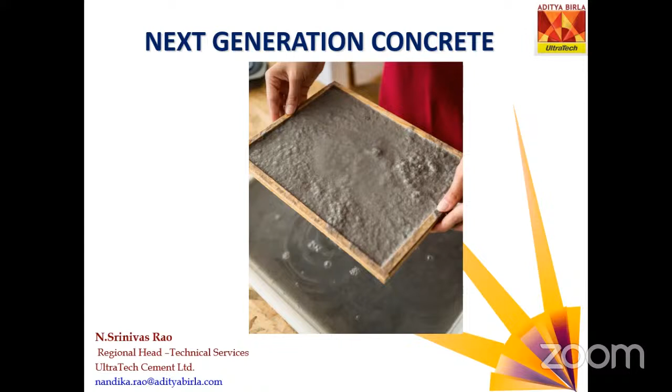Moving forward, the next generation concrete refers to the formulation that enhances performance, based on so many parameters and economic design, to meet the challenges in construction. Sustainability is most important right now as we move towards carbon footprint and net zero buildings. So the next generation concrete is moving in this direction from conventional concrete, and we are also trying to manufacture some recipes for the next generation.

If you see this particular slide, I want to throw a glimpse on where the world is moving towards in construction patterns. If you see the consumption of cement, the average per capita consumption of developed countries is far higher than India's per capita consumption. The world average is 262, and India is 100.

So there is an absolute requirement today as we march our economy towards developed countries - this consumption should also be increasing. How can we increase it? Simply, we have to give the construction industry a different type of concrete. This plays a very important role, and I want to highlight this particular point.

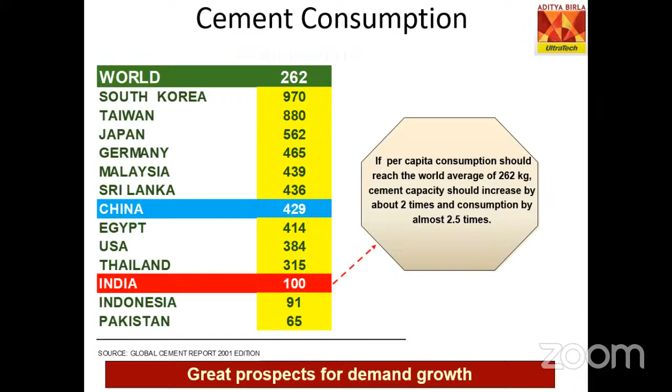Moving forward, I just want to show this - I like to show this one. This has been the present slide, given by one of my seniors who I always take as a guru. This showcases the civil engineering pattern where it's like a 16 million year old tree which has deep roots in the industry.

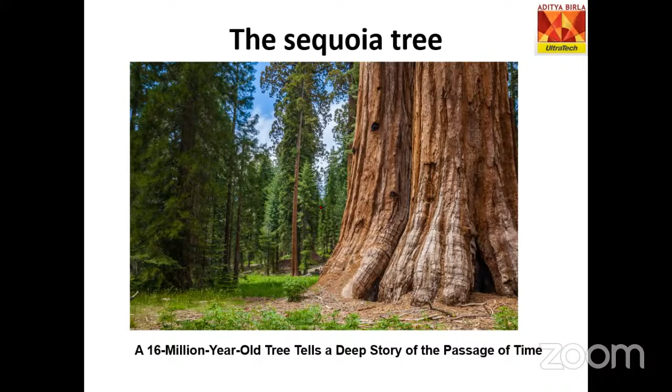I consider civil engineering like this - even when it grows, it creates a lot of space for people, meaning it never distracts or obstructs anything, so it grows like anything. Civil engineering is often called an enormously growing branch, and it's sad that in the last 2 years we haven't been able to attract as many students as required. But as faculty members, we can make students understand this civil engineering pattern well.

So I'll start my presentation. Having said this context, it started with stone. Earlier, stone was available in abundance, but it also had constraints - it's a heavy material, it has to be moved, you cannot move it for the largest distances, and the cost was high.

But still, if you go to the history, we as humans have built a lot of structures with this generation - be it temples, dams, or the oldest structures.

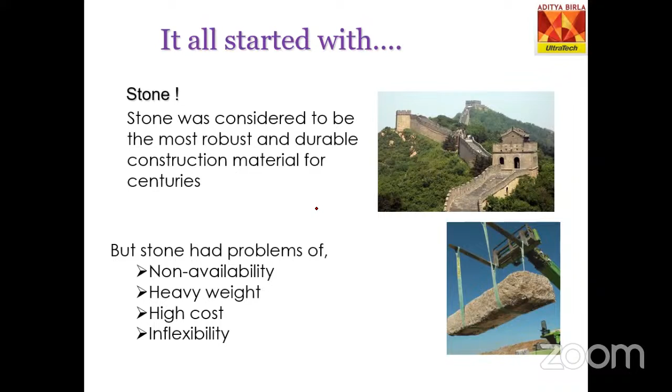Having said this about this pattern, what is the solution right now? We have to make some alternative for that. Then came concrete, which was a solution provider for replacing stone. Many people call concrete a 'flowing stone' because it can be manufactured at any place required - only 3 or 4 materials are needed.

We can place it in any location, manufacture it, and shape it into whatever form we want. This is called a flowing stone.

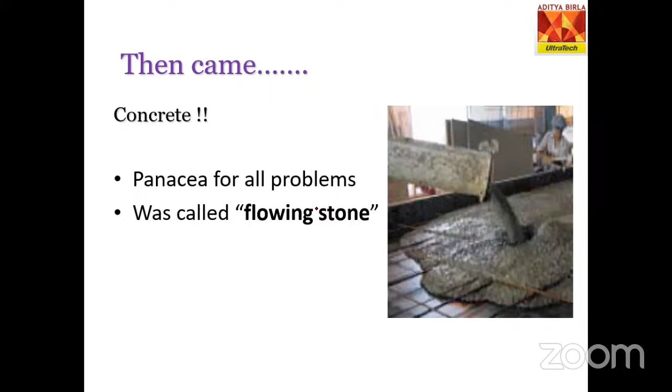After that came an era called special concretes, which is today's topic, where we can alter the properties, behaviors, composition, and performance of concrete as per the requirement or need basis. That is a special concrete.

Conventional concrete has some basic properties everybody knows, needless to explain. But what are the special concretes? What innovations in concrete are happening? I will explain in the further course.

This photo I took way back in 2017 when we offered a solution for a government requirement project where they wanted to completely remove old construction systems.

This place is called Erravally, where if you belong to Telangana, you'll know it has a very prominent role, as the ex-CM had his own constituency there. He wanted to offer 2 BHK houses for the people.

It was a requirement for the people, and one of the main agendas in the election campaign was to give it at free cost. But when he came into power, there was a challenge of construction because he wanted to build very fast, reduce cost, make a durable building, and also make it economically viable. These four challenges were thrown to a civil engineer, and we went to the site and saw these photos.

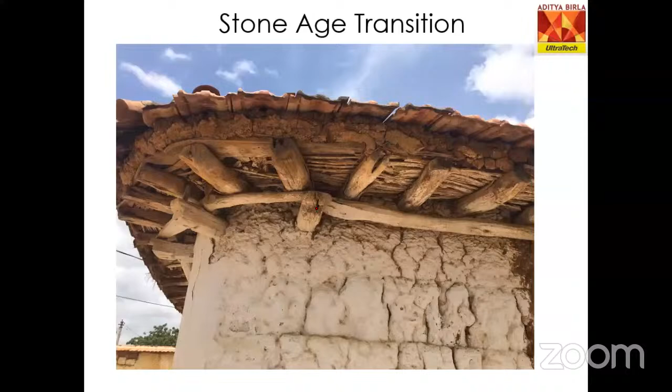We offered a technology called precast, or shear wall technology, where the entire structure, from the base or foundation, can be erected as a single formwork right from the columns to the beams and slabs, and it can be cast at the site at convenience.

Believe it or not, it can be constructed within 7 to 10 days. The whole shell of the structure can be built in that time. This is the industry demand that people have accepted.

It is earthquake proof, it is fire proof, it is very fast to construct, and within no time people can occupy these buildings.

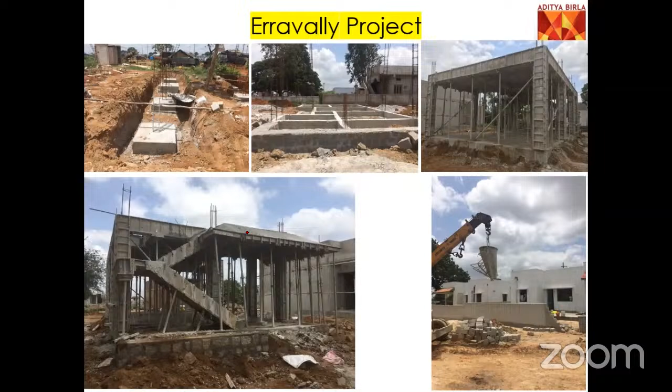This is a classic example from my experience when I joined Ultratech in Telangana. What I learned from this is that concrete is a very safe material. It uses very few natural resources, unlike what people say about its carbon footprint.

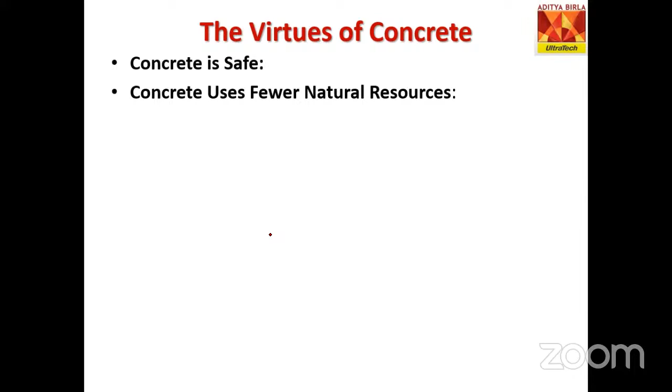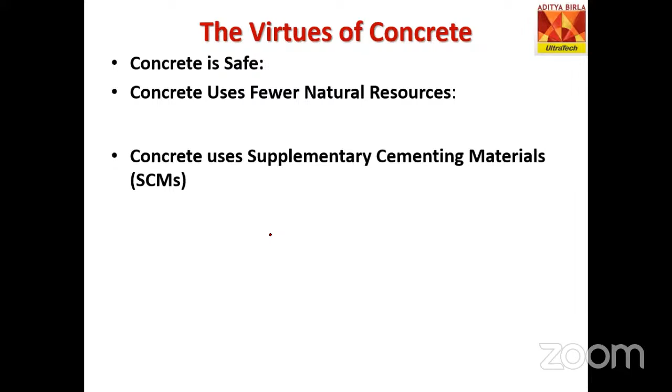People say that producing 1 ton of cement takes almost 1 ton of resources. But thanks to new technology, we are using supplementary materials, replacing cement with cementing materials like fly ash, GGBS, metakaolin, and other materials that people consider waste. These are being consumed into concrete, saving a lot of energy and materials.

Apart from that, concrete is also now using recycled material. I have a slide on recycled concrete.

Apart from that, to start the cement process, there is a lot of requirement to burn fuel. For example, to give energy to the process, people are using recycled material, such as scrap tires, as fuel.

In recent times, there was news about a brand being banned - I don't want to name it - where the waste material could not be dumped anywhere because it was food grade material. It could neither be consumed by humans nor animals, nor reused in any form.

In that situation, the cement industry came forward. They took this rejected material, which the government did not allow to be used otherwise, and used it as fuel in the cement industry, maintaining that ecosystem.

Even the waste water used in RMC, ready-mix concrete, is again being reused for material because it has some cementitious material. So all these are the virtues of concrete.

A lot of research is going on in the industry right now. People are using cementitious material in terms of blended cement, fly ash, GGBS combination. If you see the recent trend, new sets of cements are coming. For example, composite cement is one innovation coming into the market and will continue in future, blending two materials like fly ash and GGBS. It now has a code, and it has a very valid reason for the industry because it saves a lot of environmental effects.

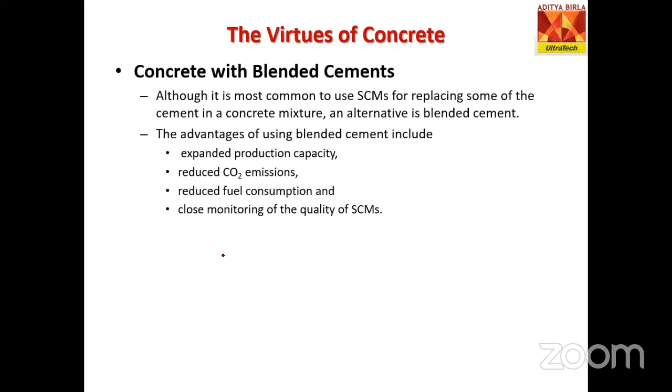So these are the effects where people are going, and this recycled material I was talking about, the aggregates and everything, can also be viewed in the next slide.

Now coming back to aesthetic structures, concrete can be built higher and higher, taller and taller, in whatever shape you want to construct. Right now, people across the world are aiming for constructing taller and taller structures, which is actually a game changer in society. For example, any country wanting to attract tourism claims they are going to build a taller structure, like Burj Dubai or other structures, where the tallest structure is referred to as a tourism attraction.

Now, to make a taller structure, often we cannot use conventional concrete. We require some specialized concrete. In that context, I will be showcasing some varieties of concrete in future.

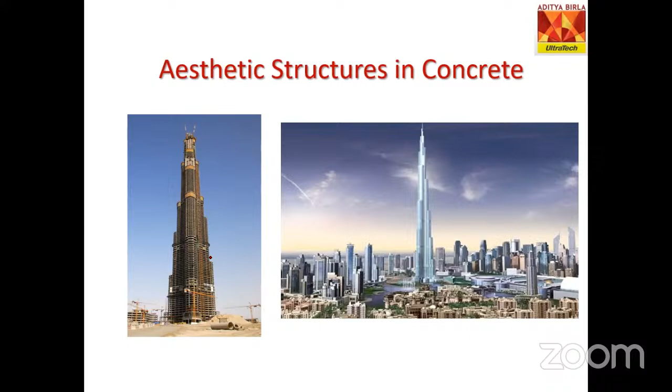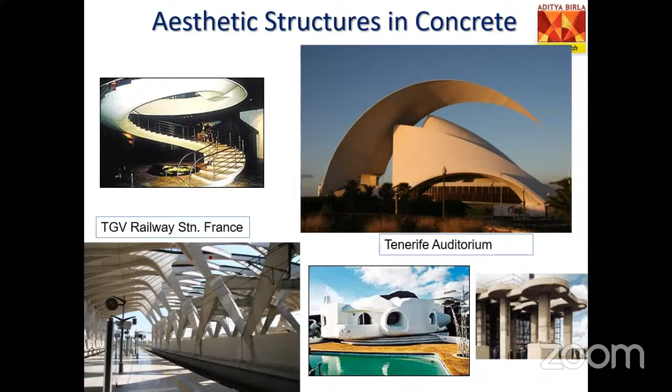This picture represents that concrete can be twisted, shaped into any shape or form, whatever design we require. Adding to that, concrete is generally considered a gray or dark material without attractiveness. Now, thanks to the new chemical industry, we can add a lot of pigments and dyes to the concrete and make it very colorful, like shown here.

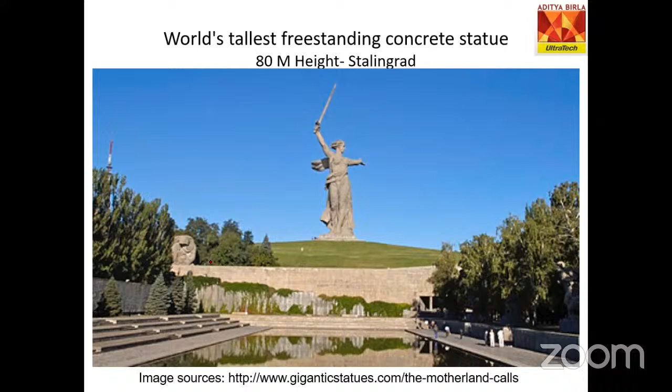This is one of the tallest structures I want to highlight, though it is not made with 3D concrete. The structure in Stalingrad is an 80 meter height structure, made only with concrete, no other materials except reinforced steel fibers. Going into the history and sources, which I have noted below along with the references mentioned, this is one of the 80 meter height concrete structures made in Stalingrad, in the USSR, Russia.

Now coming to the sustainable part, roadways. It is one of the saddest stories that most people who are killed are not killed by terrorism, floods, or natural calamities. Most deaths occurring in India are actually happening due to road accidents. Road accidents are not mainly due to overspeed, but due to the bad quality of the road.

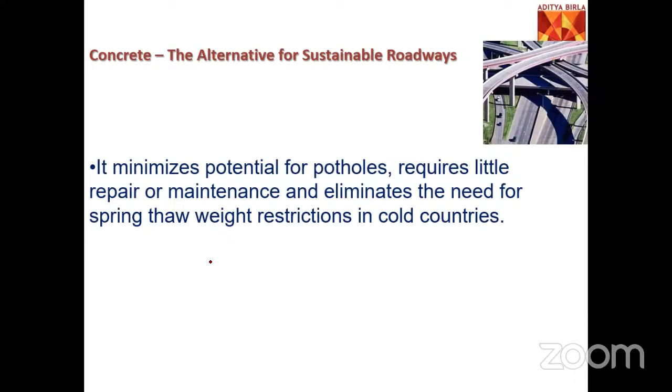Many of the potholes you have seen in the industry are the main culprits for accidents and casualties of human beings. Now there's an innovation technology that has transformed and reformed the way we are making roadways in the country right now.

The cement concrete road, or white-top road, is more economical than asphalt in the long run. People say BT roads are more durable, but if you calculate the life cycle cost analysis, you see this white-topping road plays a very important role.

We chipped this road and used an advanced material paver machine, brought from another region. The top layer was scraped, the bottom layer was hardened, and immediately this white-top road, with a thickness of 4 to 6 inches as per design requirement, was made. Thermal gradient grooves were cut, and it was made ready. Even after 12 years, it is working without any maintenance.

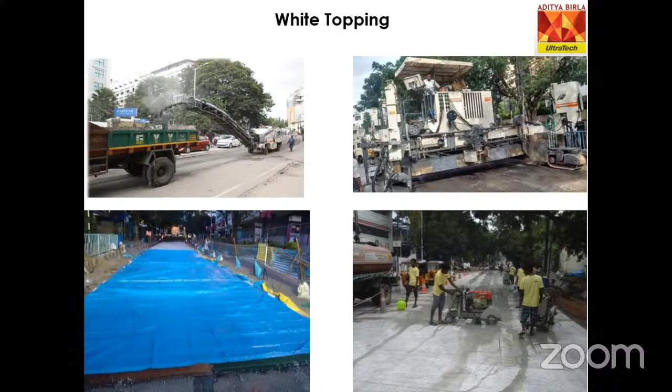It's a zero maintenance road, and you can see the rider comfort on the road - it is absolutely stunning. Seeing is believing. This is the white-top road we have done in our own Telangana, one of the new technologies that is really succeeding.

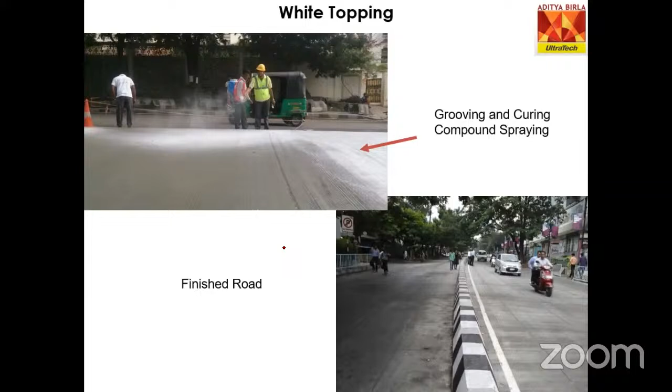After seeing the success, the BJP-led government, through Nitin Gadkari, the minister for roads and transportation, also offered that it can be implemented all over the country. So this technology is changing the face of the roadways that will be constructed in future.

I won't discuss concrete pavement further due to time constraints. I just wanted to show the changes happening for innovation in concrete material itself. For example, the aluminum formwork I already explained is a very lightweight material that can be fitted with a simple nut and bolt system.

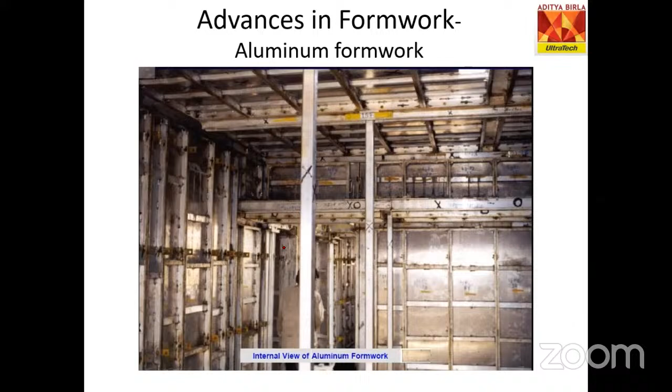With the help of two levers, we can assemble the concrete formwork faster than conventional steel shuttering formwork. All the walls of this building can also be cast with this formwork, which is very light, and the finishing is very smooth.

This is the entire building - all the walls and slab shuttering, the wall shuttering, even the provision for windows were made, like a single unit. If you look at the labor, you can see hardly 3 or 4 laborers on the site itself. With the scarcity of skilled labor in the industry, this proves a very important milestone for us as an industry and as a construction fraternity.

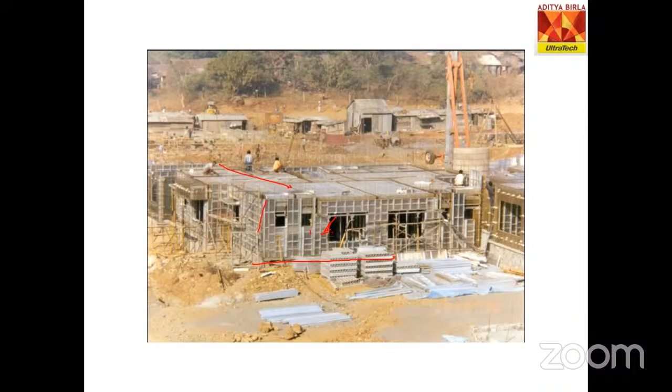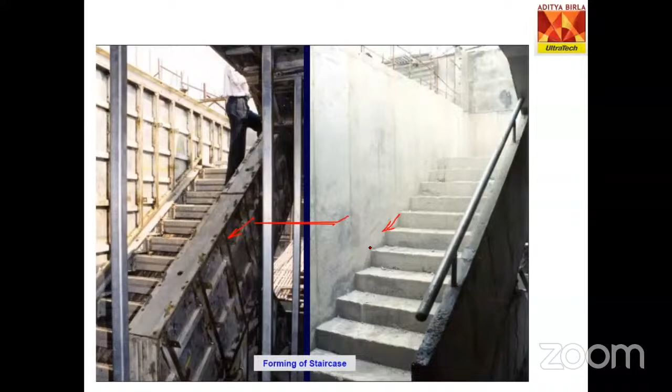This plays a very important role where we want to increase the pace of construction. Even the staircase - this is the formwork, and this is the concrete after it was cast. The entire thing, from staircase to building, can be made in a better way. This is the door, window, column attached formwork - all aluminum.

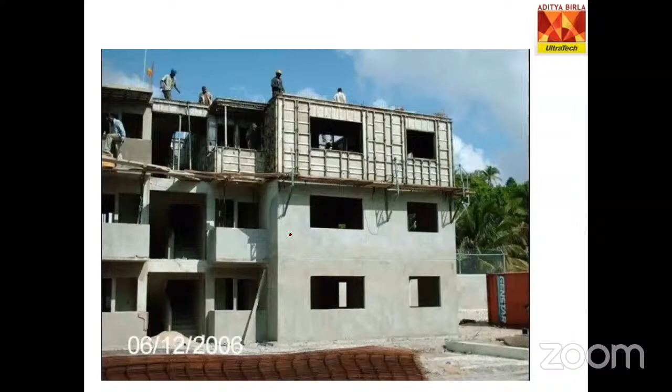This building shows that 4 floors can be built very fast, and the formwork can be repeated, simply taken from one floor to the next. In 16 days we can complete the entire 4-story superstructure. This rapid construction really helps us as a solution provider in the industry, where fast building construction happens without compromising on quality, aesthetics, or design - everything is taken care of, as fast as we can build.

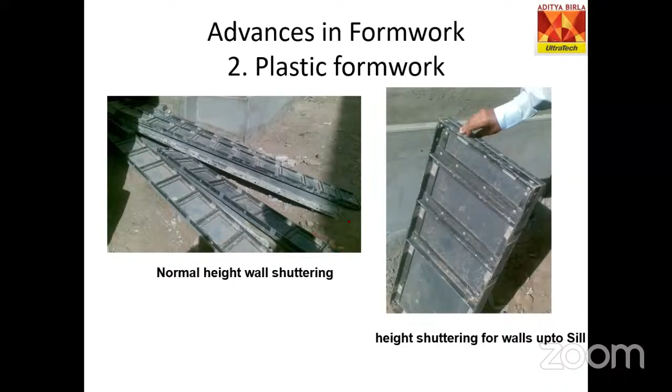This is the challenge: four stories are being constructed in 16 days. This is true for the conventional part too. At sites for individual houses, replacement of materials is happening. This is actually a nut and bolt system. People can construct and make a wonderful structure without any undulations. For the walls, geo panels are also available.

Now coming to the innovative, next generation concrete, the first recipe I can show you is lightweight concrete. Everybody knows we reduce the density of the concrete by using lightweight aggregate, or infusing the materials required to make concrete very light. So many materials are required for this, and they are available right now.

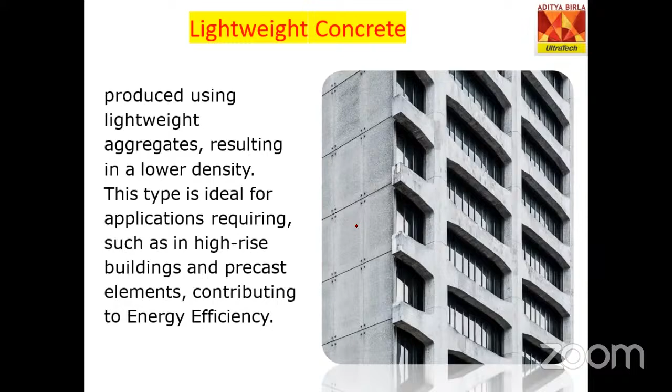For example, this is foam concrete, which we manufacture at our own RMC, where foam is induced into the concrete itself. The density is reduced to 1/6 or 1/8, from 400 kg per meter cube to 1600. The strength will be around 1 to 15 MPa, because it is only for barrier purposes for walls and similar applications.

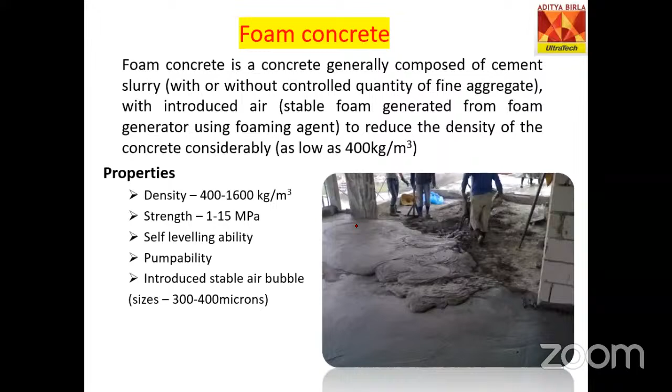It is a very good pumpable material, with a stable air bubble system we have introduced which occupies the concrete as voids, but they are not interconnected. The idea is that if they were interconnected, there would be leakage problems. So this is the new technology we have been developing.

This is the foam concrete manufacturing process at RMC. It's a simple technology that can be made available anywhere now, in Telangana or any part of the country.

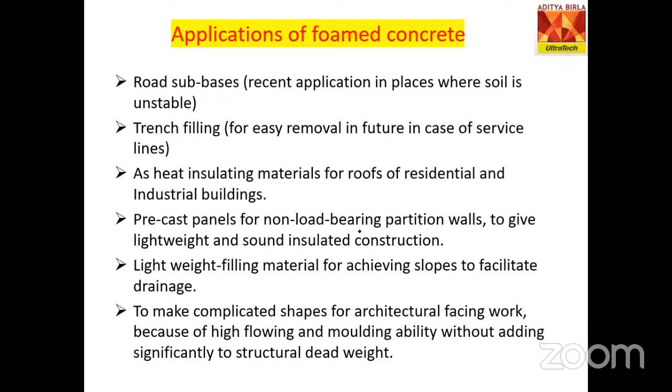Applications of foam concrete are many. For example, we can use it as a heat insulating material, for road sub-bases, trench filling, precast panels for non-load bearing members, light filling materials in slopes where we want to control water inflow, and even for filling sunken slabs in complicated situations. So lightweight concrete comes into the picture.

I'll show this video after this presentation. This is one variety we call in UltraTech, called Lightcon, branded for use. It's a very light material, pumpable. If you want to increase the height of the flooring, or maintain a slope, this can be used as a filler material.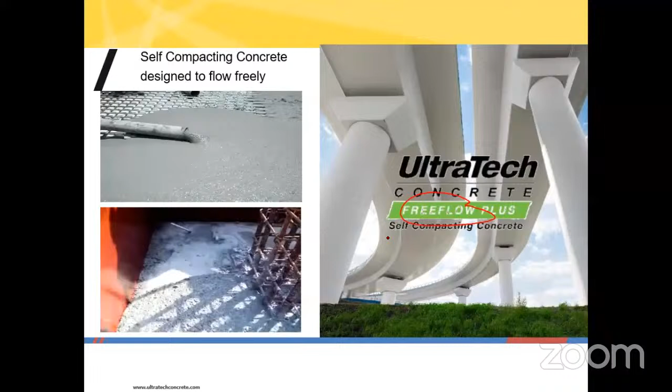Now, self-compacting concrete, people are very much aware of this one. In Ultratech we have a product called Free Flow Plus concrete, which gives a very consistent self-compacting concrete, with so many advantages in the market right now.

These are structures where we executed a project called Hypercon, high strength concrete with self-compacting concrete. The grade of concrete can be M10 to M60, and the fresh property of concrete should have a minimum 500 flow, which we test at the site using the flow table.

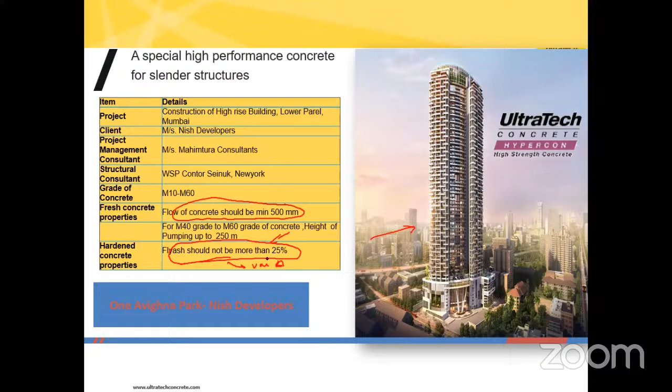These were the challenges we faced, including that we should not use more than 25% fly ash. Having said so, we used VMA and other materials which enabled us to make the concrete self-compacting. This was executed in a project called Avighna Park Development.

Leakage issues are one of the main culprits in the industry, causing degradation of buildings and repairs, which we often see even in newly constructed buildings. This causes a lot of revenue loss to builders and contractors. Having understood this problem, we designed a guaranteed concrete called Aqua Sealed, which comes with a 10-year guarantee and doesn't allow water to leak, especially in basement areas.

For larger structures, we use crystalline technology to plug gaps. This technology uses a hardened gel, so when there's a small crack, moisture ingress causes the gel to react and occupy the space created by the crack, sealing it and never allowing water to pass through. This is one concrete where we give a waterproof guaranteed concrete for the damage.

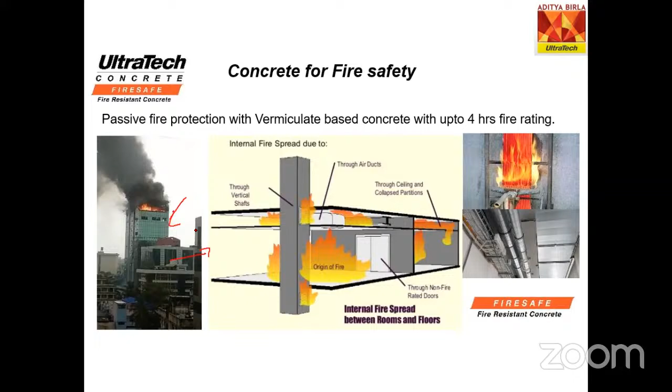We manufacture this fire-safe concrete from our RMC. It's a fire-resistant, vermiculite-based concrete, meaning it retards or delays the firing rate of the concrete, which helps evacuate people and stop the loss of revenue or property from this kind of accident. These are new types of concrete where we can give a customized solution based on requirement.

Now these are some pictorial graphs showing our testing procedure. I want to show this for academic interest, to explain how we do it. This type of concrete is especially used in the depths of lift shafts, where fire tends to aggregate during an accident, so these are the areas we try to restrict and protect.

Now one type of concrete is also changing. When we look at concrete properties, it should be hard, durable, not allow water to pass through, and be very dense. Against this, we are trying to reverse the property of concrete with what's called pervious concrete, which allows water to pass through.

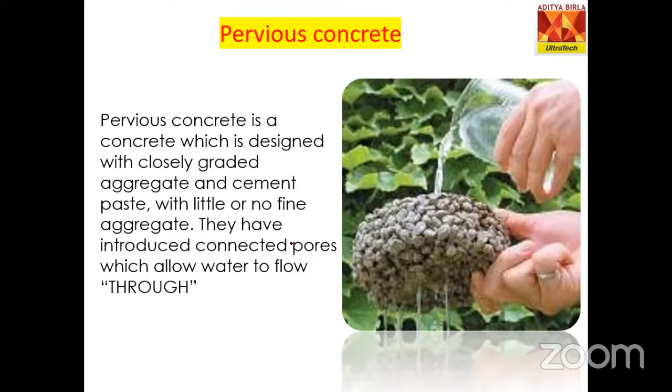This has a lot of value right now because of the scarcity of rain. In summer, many cities are struggling to get water because concrete roads that have been paved don't allow water to pass through, so the ground table isn't able to recharge. As a solution, the industry has a concept called pervious concrete, which can be made at our RMC plants.

Whatever the client's requirement, here's some interesting background: when I was in the RMC lab, we made what's called no-fines concrete, which can also be termed pervious concrete. As the pores are interconnected, it allows water to pass through. This is one of the varieties of concrete that can be made.

This is a video from one of the exhibitions where we displayed this concrete, and you can see the water passing through the concrete surface itself.

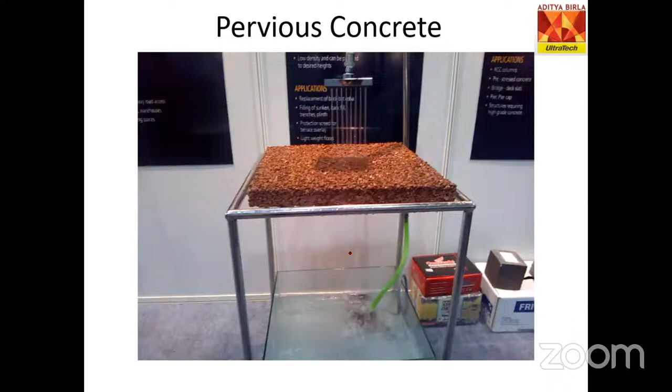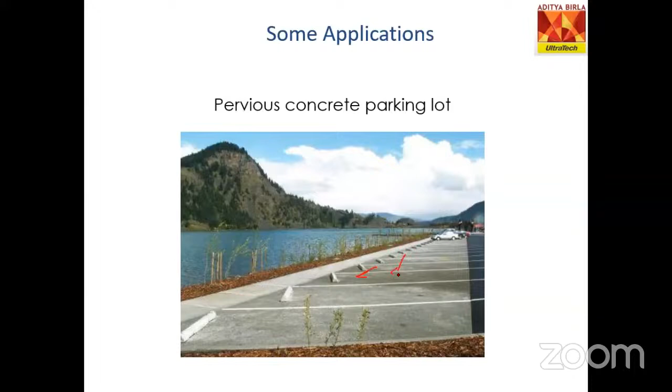So what is the application? If you see the applications, parking lots, nearby water-logged areas, or areas requiring water recharge, we can offer this as a solution provider. When rain falls, the water will be discharged and the purpose of the parking area will also be solved.

For example, in parking areas or walking areas where we need not cut these plants, or don't require proper drainage facility, we can make walkways using pervious concrete. People can walk through it, and it's also helpful for water to pass.

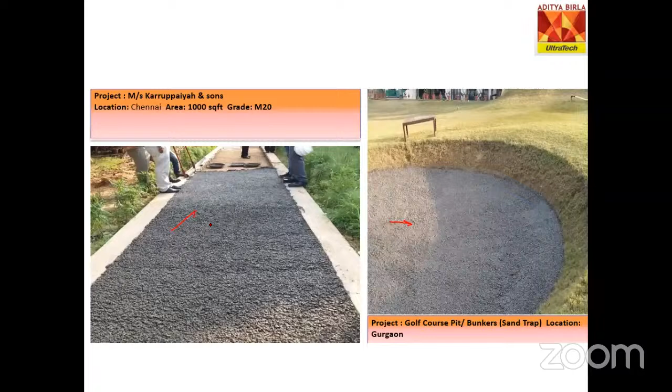This is one of the areas where we made, in Chennai, M20 grade concrete was casted for the walkway application.

These are the applications where we can use it, right from residential roads to all these mentioned areas. Recycled aggregates are coming into the picture where many structures are being demolished and industry waste is often thrown away as waste material. This actually plays a very important role right now, throwing light on how to use this aggregate which has been lying wasted in so many places.

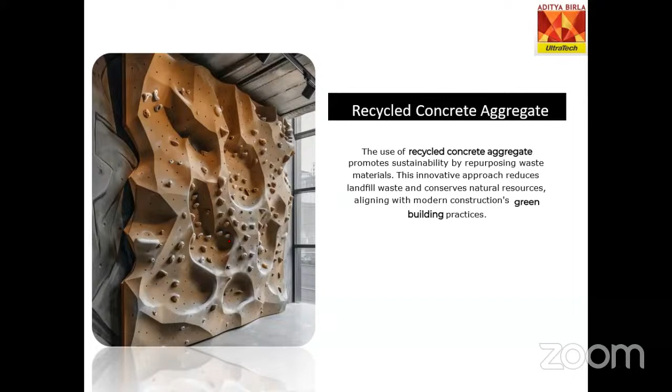The government is also moving industrial waste, and people are taking it and recycling it. We have seen that recycled fine aggregate is also something people are trying to make. There are so many industries working on this. Recently I was at a green building exhibition and saw that people are also trying to make recycled fine aggregate, similar to how natural sand is extracted. The process is simple, not that complicated, but it can be used as a recycled material.

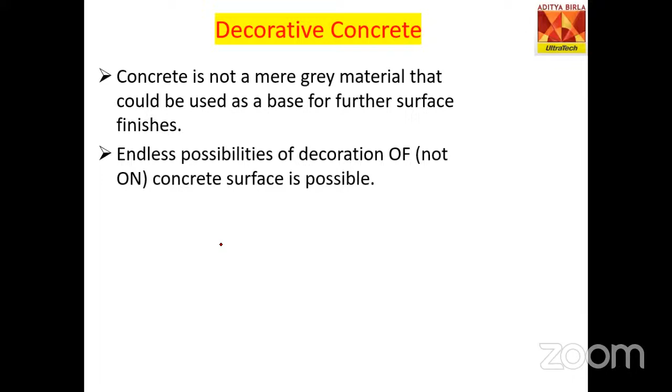Moving on, I want to draw your attention to decorative concrete, which is like an imagination of the civil engineer. People say concrete, being a gray material, is dull looking, but thanks to modern chemical industry processes, we are trying to make concrete more colorful. For example, this slide shows that even during manufacture, at the core of the concrete itself, we can make it colorful.

When we make it colorful, many pigments can be added. For example, this is architectural concrete - if you see these photos, all this flooring and finishing is made with concrete itself. If you want to replace stone or tiles, we can do that, and the longevity of these structures is very long, almost 20 years.

Maintenance is very easy, it's a washable area - whenever required we can wash it, or use some enhancers to make it more colorful. These are glimpses of case studies of projects where we have executed this decorative concrete at sites.

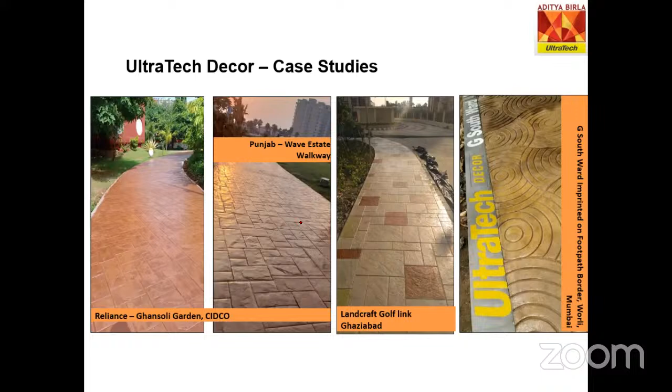After this, in kids' areas, many gated communities don't want certain issues, so we can make a ludo point, a checker chess pattern, or whatever pattern is wanted, along with granite or natural stone finishing - everywhere we can make it with colored or decorated concrete. Now these are some polished concrete examples.

The concrete itself is replacing granite, a natural material, but we make it in a granite form. People say granite is very hard and heavy to use, often increasing dead load in the structure. But when we encapsulate the same pattern into concrete itself, it can be polished. This glossy finishing pattern is the Ultratech decor concrete, or decorative concrete - sand and pepper finishing and everything.

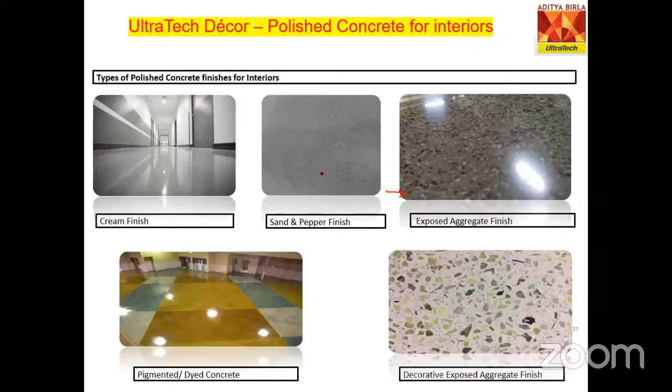For polished concrete, consider the industrial application with large walkways - for example, a shopping complex or community mall where large spaces are needed, and people use tiles or other materials. But with high footfall, abrasion increases on the surface. To resist this abrasion, polished concrete comes to the rescue of contractors and customers, easily cast with steel fibers or polypropylene fiber mesh, making a very good-looking, decent mall.

Some of the areas where we applied this are called I-floors, which is industrial flooring, where you can get a high strength grade, right from M40 to M80, which we can design in a simple way. We have trained applicators who can execute this project as well.

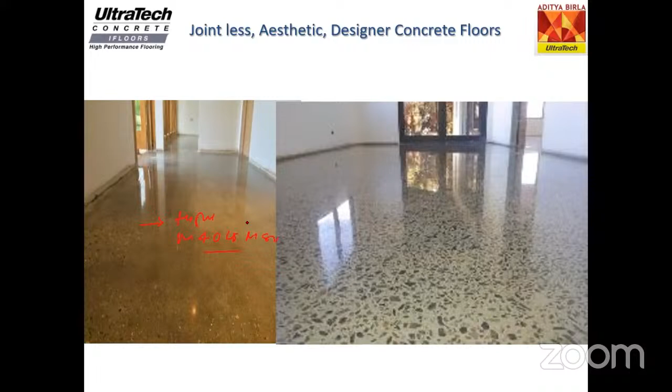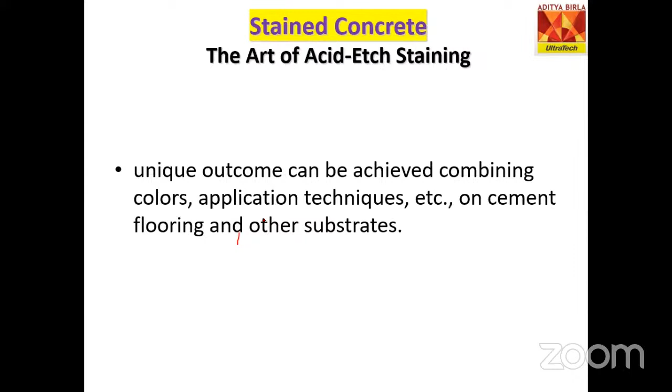Now, moving forward to the other concrete, it's called stained concrete, which can be etched with acid, and we can make colors.

So, few glimpses - this has not actually been executed, just for the benefit of the audience. We have collected these from different areas and the internet also. If you see this, it's not a natural stone - this is concrete that has been etched with acids to make it colorful. Whatever patterns you would like to have, we can make with this. Because of the dyes and pigments we use, we can make a lot of varieties of concrete, right from this kind of pattern, multiple patterns, or whatever patterns you want, using dyes in the concrete itself.

This is decorative concrete. The disadvantage of paver blocks, when you want them in a parking area or larger areas like a playground or walking areas, is that while paver blocks have the advantage of allowing water to seep inside, if one paver block comes out due to undulation or unstable bed conditions, this leads to a lot of problems - growth of trees, unwanted algae, and grasses, which is also not convenient for maintenance. So we can replace this entirely with concrete which has so many patterns.

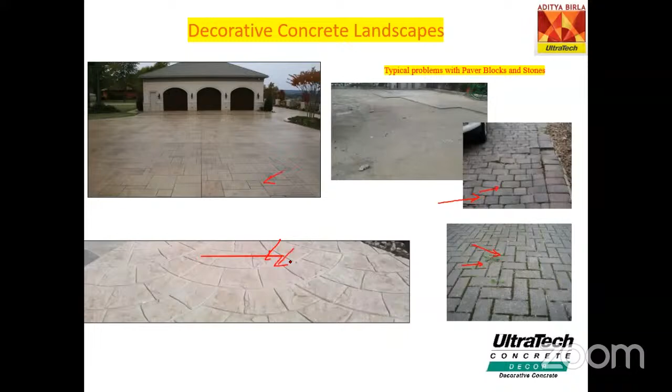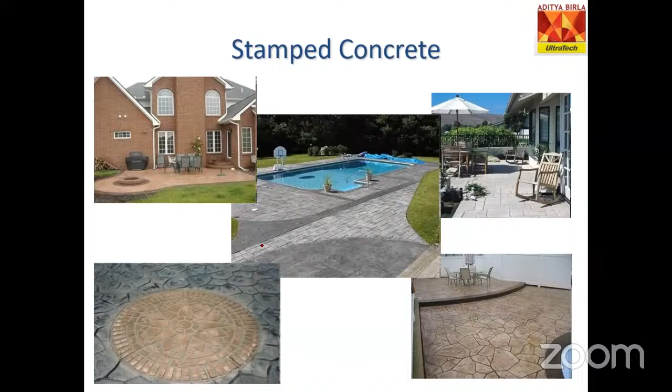So this is a wood finishing, and this is stone finishing as well. This is how we move with decorative concrete, and these are some of the patterns I already showed you. This is called stamped concrete, where we have a specific design - if you want to replace granite stone, we can, and use it at places like swimming pools, patios, sitting areas, or internal areas. Some more patterns, just to show you for the benefit of this.

After that, you've seen people talking a lot about ultra high performance concrete, UHPC, where we can achieve strength with a very lean structure, meaning we can reduce the element size also. For example, we can use it for facades, precast bridges, and architectural structures, or whatever imaginations we have - we can translate them using this ultra high performance concrete.

Recently, we have executed ready-made facades in Ultratech, or it can be customized with customers based on requirements. The strength we can achieve is almost 170 MPa with 25 MPa flexural strength. This is enormous - the benefits of ultra high performance concrete are that we can reduce the structure size and it can be transformed into any shape.

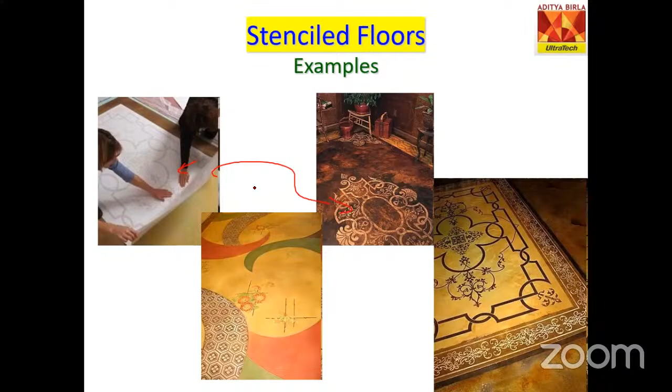Stenciled floors are now in the picture, where we can transform our old cultural patterns. For example, if you have one pattern, it can easily be transferred into another pattern by stenciling on the floors itself. This is one of the ideas where I want to show that civil engineers are not restricted only to strength or application - whatever designs, imagination, or colors you want, you can make it happen.

So I was talking about concrete furniture - a few furniture pieces, for example, can replace wood itself. Having these panels, a simple panel can be painted to make it more decorative, and you can replace wood entirely. Wood, as everybody knows, has become very costly now, and we are not getting the right quality of wood. Termites have been attacking the wood, and the maintenance is very hard and tough.

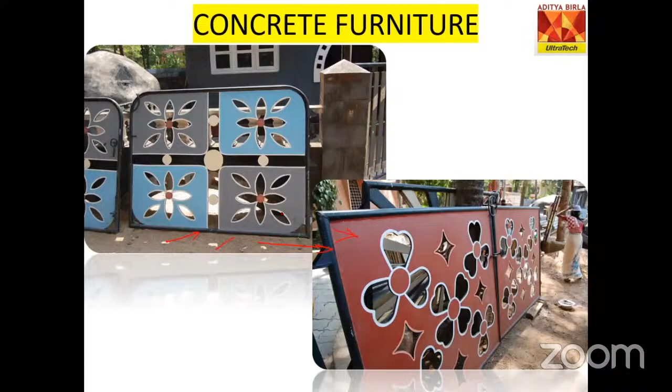So we can replace this one also. These are the areas where even the staircases, the benches, the decorative items in your homes, everything can be made. Even the gates also been manufactured with the concrete. It is not a steel or iron gate, it is only a gate made with the concrete itself.

Coming forward, the concrete countertops can be also manufactured. These are some photos I just want to show. This has not been executed by anybody in India, I'm not sure, but these are the ideas we can also explore for the students. We can make an interesting kind of project, people will be more interested to do as a project, and they can benefit a lot.

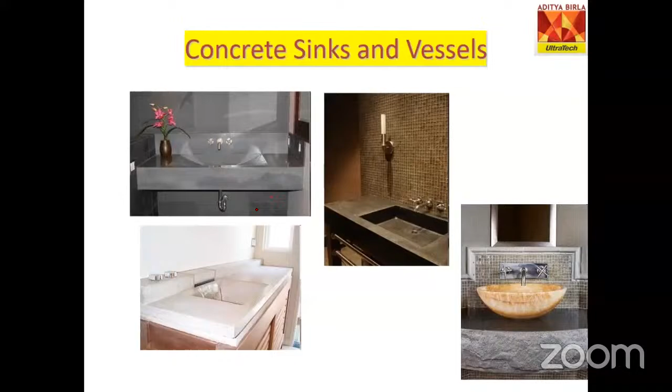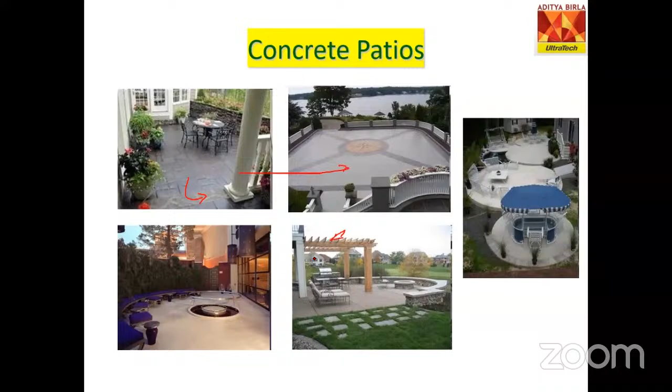So even the sinks and vessels, whatever things are there, we can make it with the concrete. These are real pictures where it was executed in concrete, wherever required you can replace the conventional material with this. All these are made with the concrete itself. This is the pattern where we can look forward for multiple designs. Kitchen places are also there.

Now I'll take you a little bit forward, where I can say what people are looking for in the future concrete. So future concretes are like photo engraved concrete, where with a technology called serigraphy technology, we can imprint our photo or the requirement image on the concrete itself.

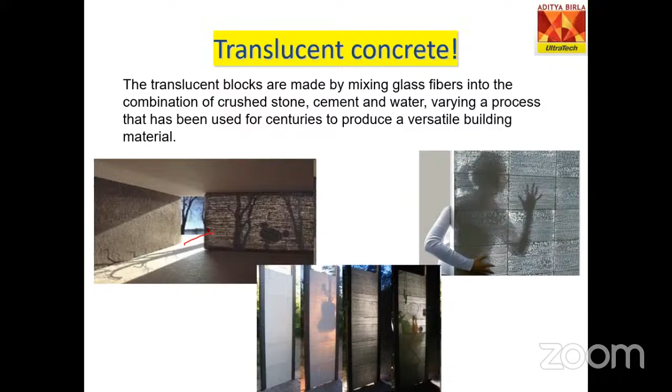Now this is called translucent concrete. People have seen it, I think many people are aware, but this has a lot of advantages. If you see, glass fibers have been mixed in, which absorb the light and make it like glass. So when light is thrown on it, it becomes like a glass. When light is withdrawn from the concrete, it becomes a normal opaque surface.

For example, I just want to play this video because it is very interesting. So I thought I'll play it, but I hope it plays. So we'll play after this.

So this will help where there is no requirement or availability of electricity, or where there is a constraint of area, we can pave a way, we can showcase it for people who often get confused in certain areas. We can make decorative kinds of parks this way, and people will be walking more on this concrete surface.

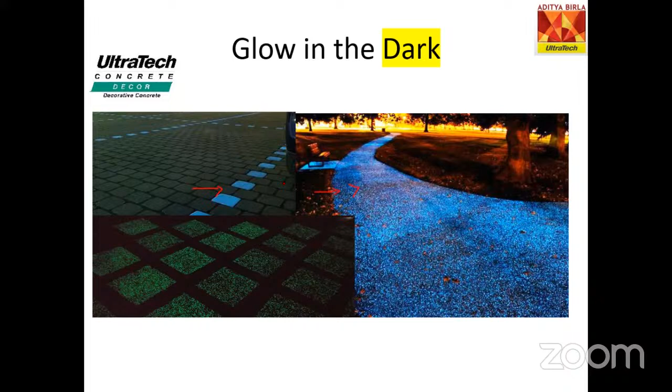So here, what I'm trying to say is that we have seen some photos where we have replaced stone, replaced steel, replaced wood, and we are also replacing natural light with electricity and vice versa. These are the things where people have seen this concrete can be bended, and with fibers added, concrete can also be bended.

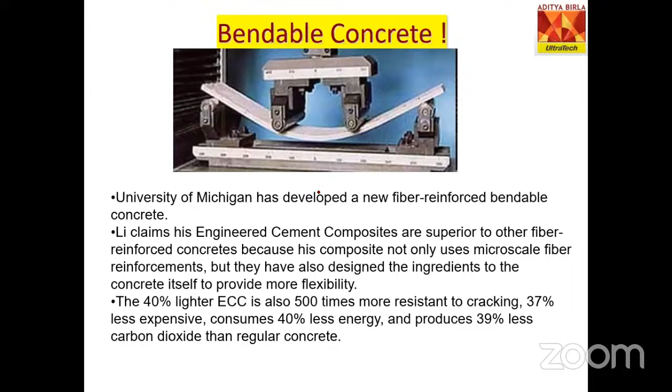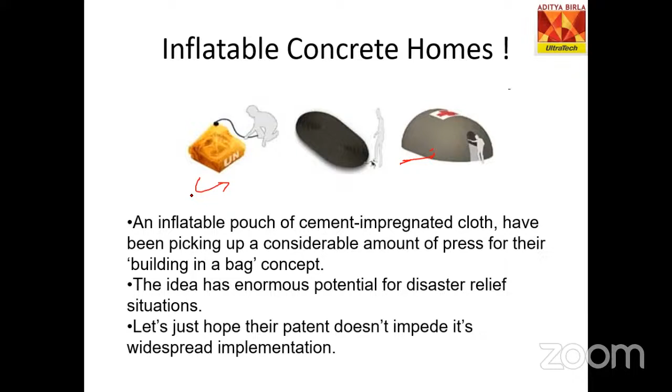I want to cover this concrete wise with UltraTech, because right from fire-safe to light concrete, decor concrete floors, pervious concrete - all these can now be manufactured with the UltraTech variety. I request any students interested, especially from academic backgrounds, who want to see this specific kind of concrete, please come to us - we'll arrange a demo at our RMC plant. You can see it, and you can also help us make new varieties of concrete. You can share your knowledge and experience so we can economize the mix and benefit the total fraternity of civil engineering. These are the solutions.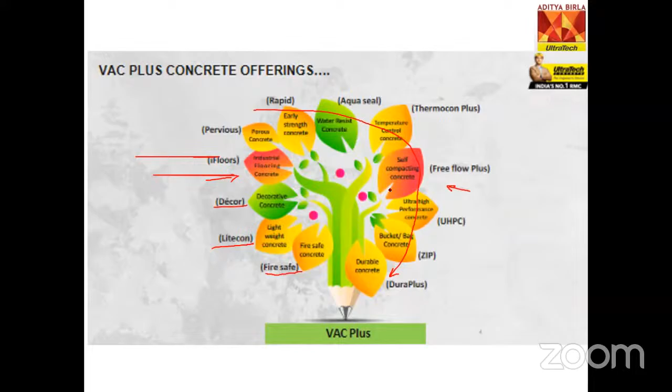I just want to close now. I will not take more than another 10 minutes.

So these are thermocon, called thermo temperature controlled concrete. This is needed where there is mass concrete involved and there is a thermal influence, for example in dams. If there is a rise in temperature in the mass concrete itself, to restrict that, we can use this concrete with materials having the ability to reduce the core temperature of mass concrete, especially in dams.

We can also use ice and other things to reduce the temperature, including cooling of the aggregates - all this can be done. This will help you in the future also.

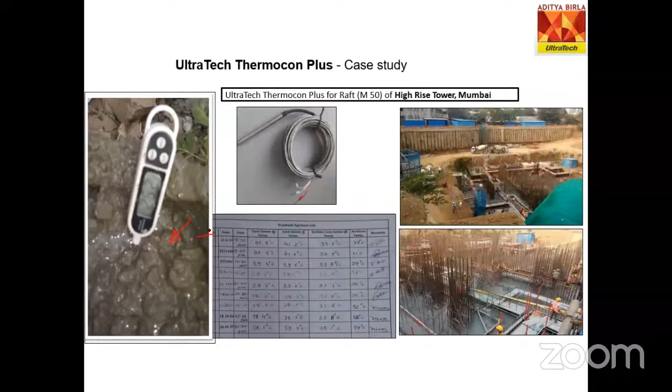Ultratech also has a thermocon project in Mumbai, where the temperature of the concrete has been constantly monitored to ensure it has not risen and is maintained. That mass concrete, M50 grade, shows the temperature maintained very well. These are areas where we can also increase the strength of the concrete.

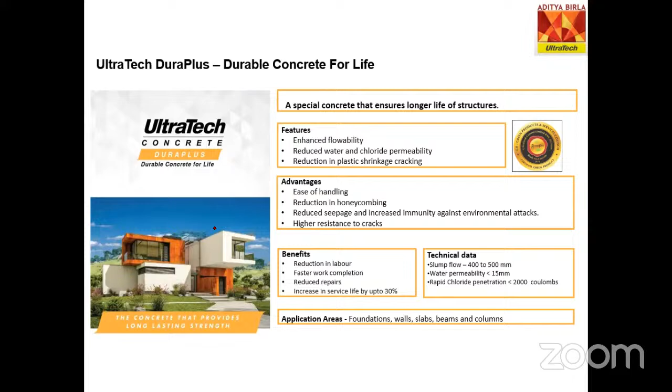We call it Duraplus - where you use the concrete, and if you want a higher grade of concrete, you can make it with this Dura Plus.

Now fibers have also been added to the concrete, and Ultratech can make your concrete have a very smooth and durable finish. It also helps with pain areas like corrosion - I will deal with the next variety of concrete. Honeycombing in concrete can also result, and this can also be addressed by this kind of fiber concrete.

This is called fiber concrete. This is called Zip concrete. This is a new, next generation concrete, I would say.

Unlike Swiggy and Zomato, where you order food and it gets delivered to you, you can order your concrete in a smaller way - smaller batching for smaller requirements. This means you don't waste any materials. When you engage a small portion of concrete, the labor charge is also high, and the application part is also high.

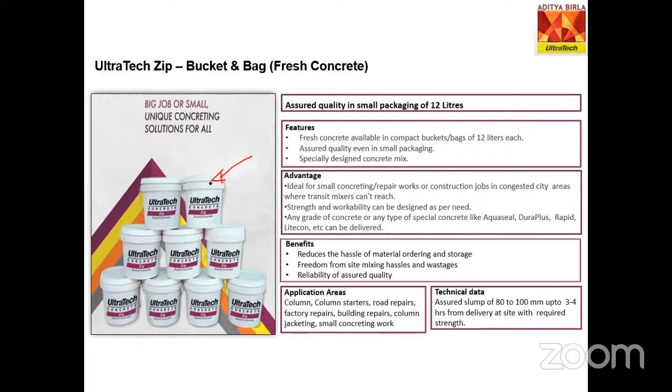So what happens is this concrete comes in bucket forms, and can also be transferred to a simple truck, and also in bags we have this facility - dry mix material that can be cut and mixed with water, and we can use it ready-made. For filling material, starters, staircase repair, or any small repairs, we can use this.

This variety is now widely receiving an overwhelming response from customers. Many customers are now asking for the repair.

Now coming to this variety of concrete, we also have corrosion protection guaranteed concrete, where we ensure that your concrete is not affected by corrosion. Corrosion is often termed as a cancer in the building, and it deteriorates your structure's quality of life. This can be addressed with the help of a corrosion inhibitor.

So what happens is it maintains the pH value of the concrete. You know it's basic, like 13 to 14. It maintains that and doesn't allow an active state, and the chlorides we infuse are also mitigated with this corrosion inhibitor. This is called the TTCI additive, which complies with ASTM G109 and has an efficiency of 98%. It can improve the grade of concrete with corrosion resistance too.

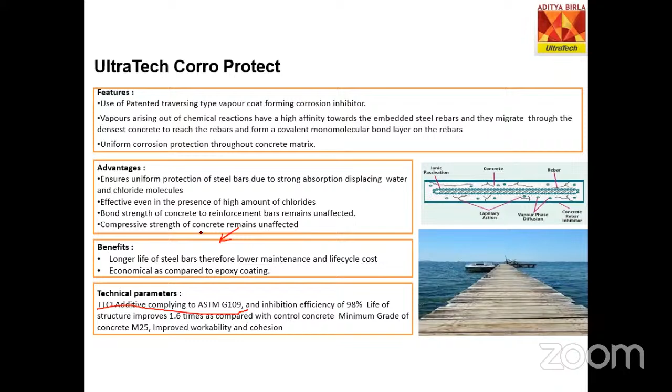So coming back to this, especially when we see marine structures, basically for pile foundations, bridges, culverts, or buildings near coastal areas, this kind of concrete can also be useful. This can be a game changer, where conventional concrete has been remodeled or rechanged.

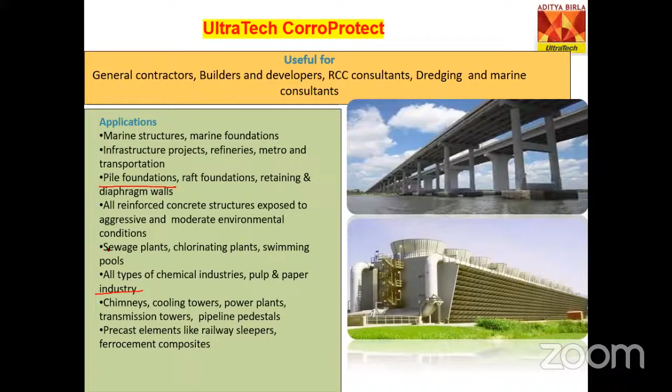So these are the smart concrete technologies now, where you can monitor your structure because inside the concrete we can place some sensors and observe the strength development. Later, over the course of time, we can regularly monitor the behavior of the concrete's strength development, and it can also give an idea of how much load or capacity it will take, and what the life cycle of the building is. It can be connected to systems, and it's most useful for the academic part, where you want to develop a newer type of concrete. This is called the smarter way for concrete.

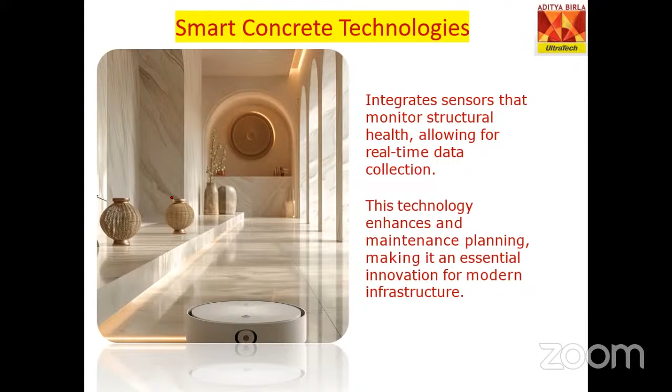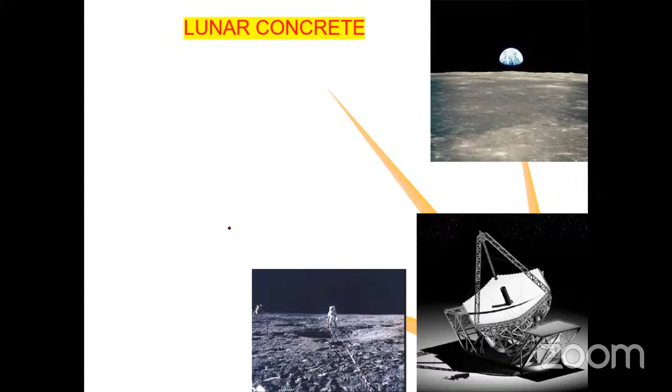And moving forward, I want to highlight that we are not restricted to Earth now. We are looking at the moon, where we see that large playgrounds can be built, research stations can be built, or structures that are ready to occupy, and it can also be used as a stepping stone. This is an area where we can stop and go for Mars exploration. So all these are lunar concrete applications that people are thinking about. We may not know that in the future many engineers will want to go to the moon for execution of projects themselves.

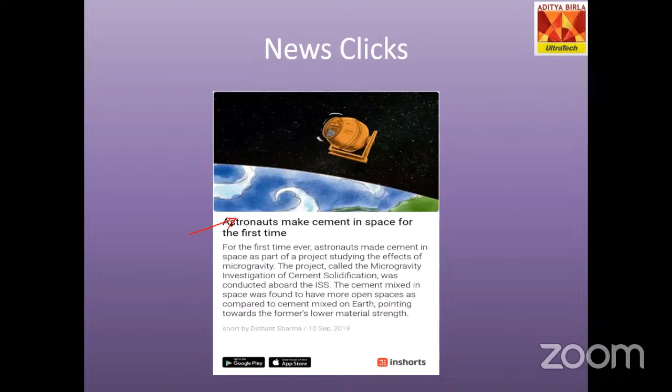So these are some changes happening in the current industry, and this is new. Even cement can be manufactured on the moon itself, because studies show that a lot of lime materials are available there, which can be directly used to manufacture cement and try to construct buildings.

Now, for concluding remarks, before I start, I want to highlight Ultratech, which is one of the largest manufacturers of cement, holding almost the number one position in India in terms of manufacturing capacity, and it's the world's third largest manufacturing company.

So we are often looking forward to diversify cement uses, be it in innovation concrete or innovative concrete, which I was trying to explain in the last one hour. And also we are trying to make a lot of varieties of cement for the benefit of our customers.

Having understood the pain points of the customer, we are one of the companies going forward as a solution provider. Wherever you have a pain point, wherever you want more information on concrete execution of a project, or want to build your own house or dream house, you can simply download the UTEC app from Ultratech, available on Play Store and App Store. It is called UTEC by Ultratech, with the slogan Ghar Banega, Sahi Banega - in Telugu, ఇల్లు కట్టుకోండి సరిగా కట్టుకోండి.

So even despite moving forward with the variety of concrete, we are now challenging the skill set of laborers. We see a lot of problems in constructing a house. That app can be downloaded from your side also, and you can go through it. There are a lot of articles on renewable energy, new concrete technologies, rainwater harvesting, and sustainable materials. We can also offer a solution called anti-termite treatment, which can be taken as a service to protect your buildings for a longer time.

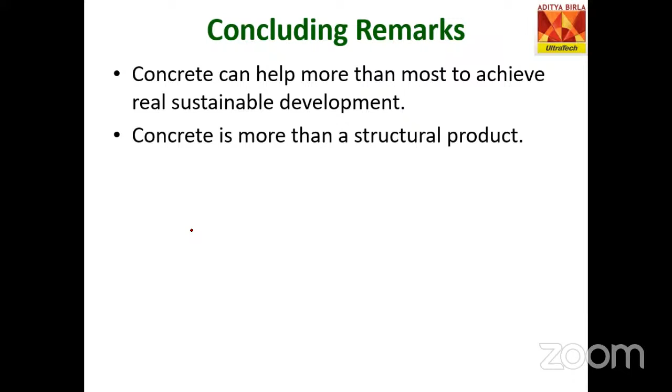We are looking at it as a style of material that gives a total solution provider - we can cover walls, we can beautify our walls also. Concrete has an incredible design versatility and flexibility, as I showed you earlier in my slide. So we have to remove the myth that concrete can only be made into linear shapes or regular forms. We can make it into any shape and form also.

And there's a myth that concrete is not an environmentally effective material, that it often emits a lot of carbon dioxide. But now, with the help of these resources, with waste material being added into the concrete, we are making carbon-free concrete in the future.

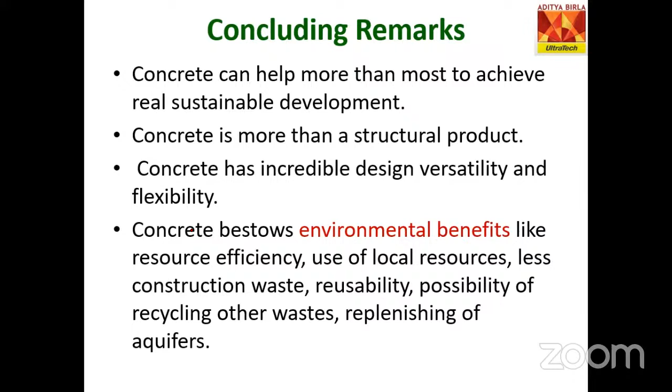So these are the remarks - if you see the economic benefits, it's like cost-effectiveness, longevity, and reducing costs, all of which are making your concrete durable and smart, one of the best materials to use in the future. Apart from that, it also gives social and quality of life benefits, because safety-wise, air quality improves if you're using smarter, greener concrete and air quality materials.

For example, you are replacing clay bricks with AAC blocks, which we have a plant for in Hyderabad itself, which actually reduces your dead load by one-third of the wall. It reduces the number of joints, so cracks will not come, moisture will not come - all problems related to this and leakages will not occur.

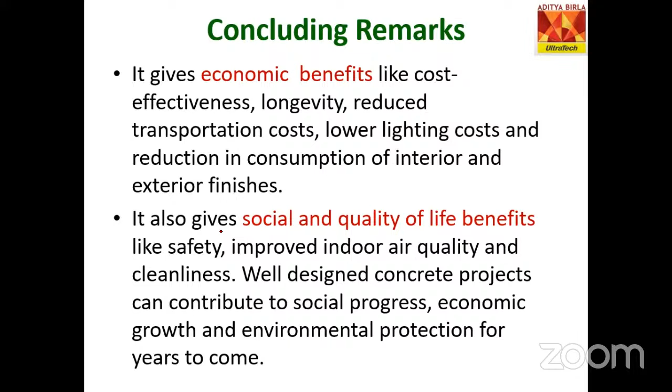If you go by Vastu also, in this technology we avoid that issue - if there is any leakage in your house, it drains out your money also. So to have all this quality, benefit, and life, we should always go for greener material.